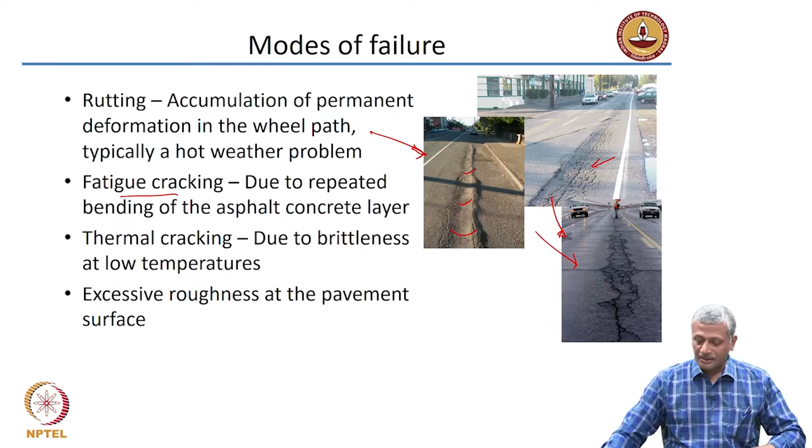Now, again, like polymers, asphalt also loses its flexibility with aging. Why is aging happening? Not just because of wear and tear caused by natural service conditions, but also because of the fact that you have ultraviolet radiation from the sun affecting the pavement surface. So, raveling is the term associated with the loss of flexibility of the asphalt layer or asphalt binder because of aging and oxidation.

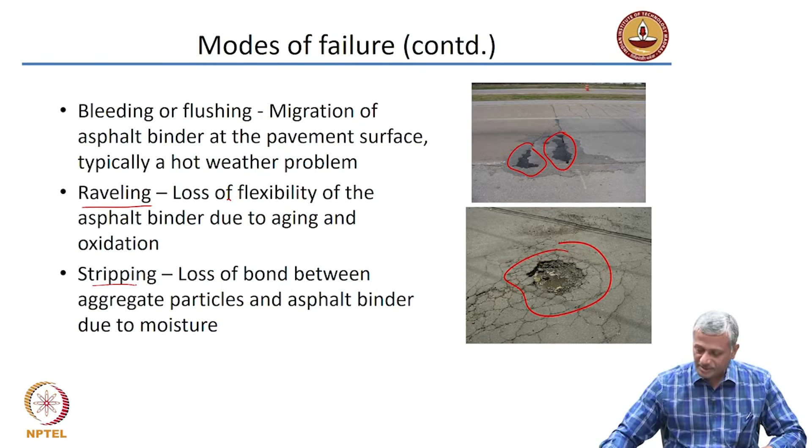Again, such potholes can also happen because of stripping, right. I showed you in the previous page also where aggregate gets completely stripped off from the asphalt. And sometimes of course you can take cores right through the highway pavement and then examine more closely what could have been the cause of the damage.

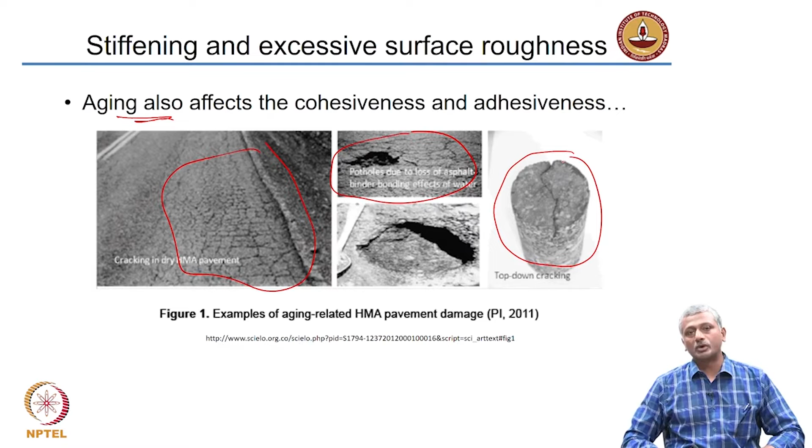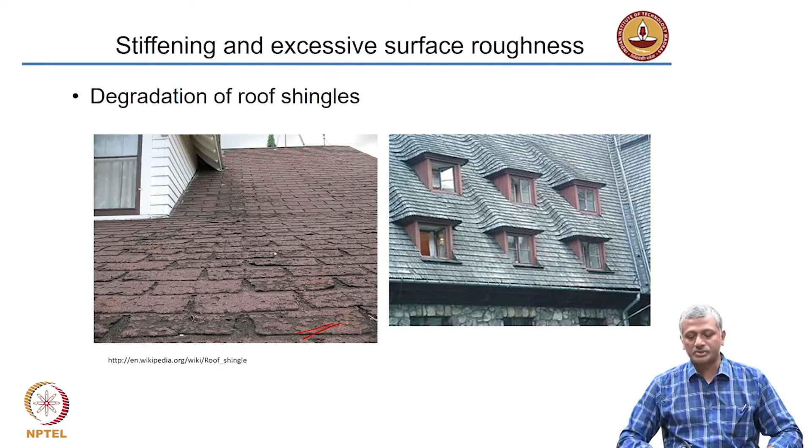Thermal cracking can happen at very low temperatures when asphalt becomes highly brittle. So, when it becomes brittle, in response to the loading the layer of asphalt concrete will bend and that will lead to tensile cracking in the system. So, you need to ensure that it does not happen by selecting the right asphalt which can function over a range of temperatures that are well defined.

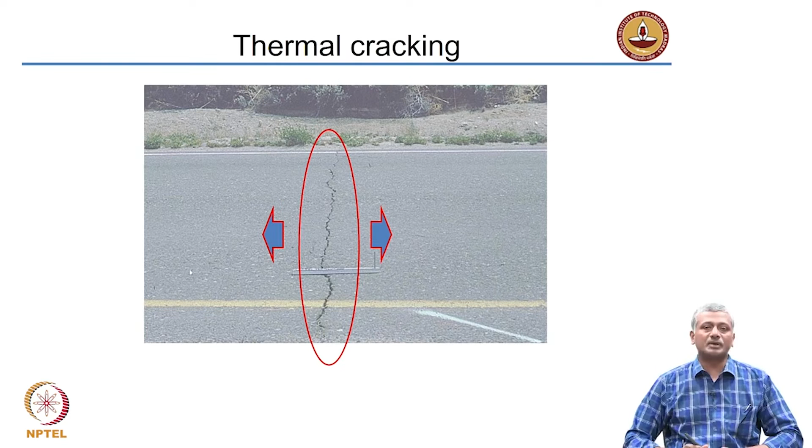So, you need to ensure that you are testing this aspect of the asphalt concrete before utilizing it in a specific pavement. Also, the needs of the asphalt concrete will depend on the type of pavement that you are making. Is that a national highway? Because there we expect all kinds of vehicles. The heaviest vehicles will be there, and you need to consider the tonnage brought in by the heaviest vehicles and convert that to the equivalent number of units of vehicles that will pass over that given cross section in a certain period of time. Based on that, you need to select your material properties to match the requirements of that particular road.

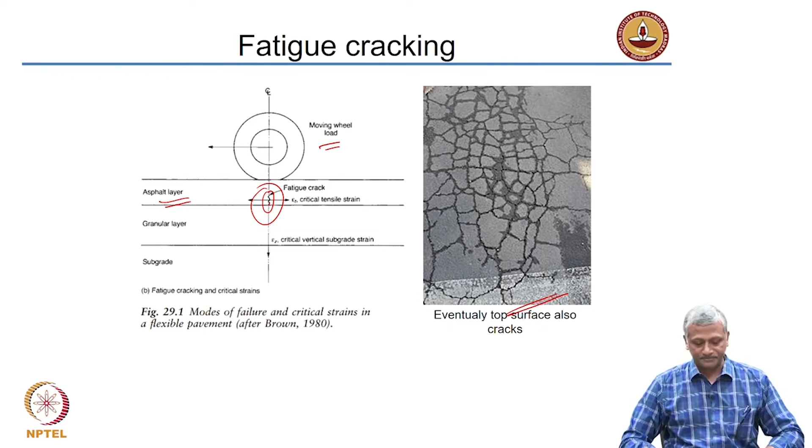Rutting, very easy to understand. You have the top layer of the asphalt concrete which is becoming soft as a result of high temperature, and when the wheel passes right on top of that, there is deformation. Deformation in the bituminous material is transferred to some extent to the granular material also, because the granular material is packed, but not packed in such a way that it does not move at all. There can be some depression forming in the granular material also. As more and more repetitive cycles of loading happen, this permanent deformation will keep on increasing.

Okay. So, you need to ensure that you design the highway pavements with asphalt which is able to sustain the temperatures. Now, one thing you need to understand, asphalt pavements are black. So, in the daytime they are going to absorb more and more heat radiation. As they absorb more heat, the temperature on the road surface will be certainly much higher than the ambient conditions.

Sometimes when the ambient conditions are 40 degrees Celsius, the temperature of the asphalt pavement can be as high as 60, right. So, because of this aspect, you need to ensure that you consider not just the ambient conditions, but what could be the temperatures which may happen in the asphalt pavement beyond the ambient conditions and design adequately for that.

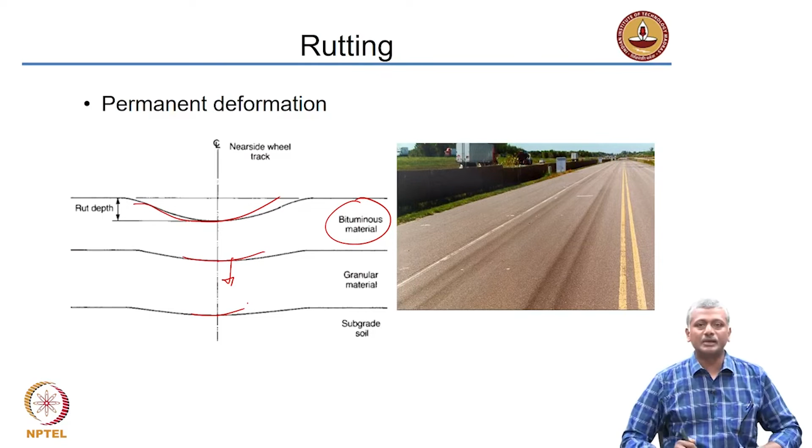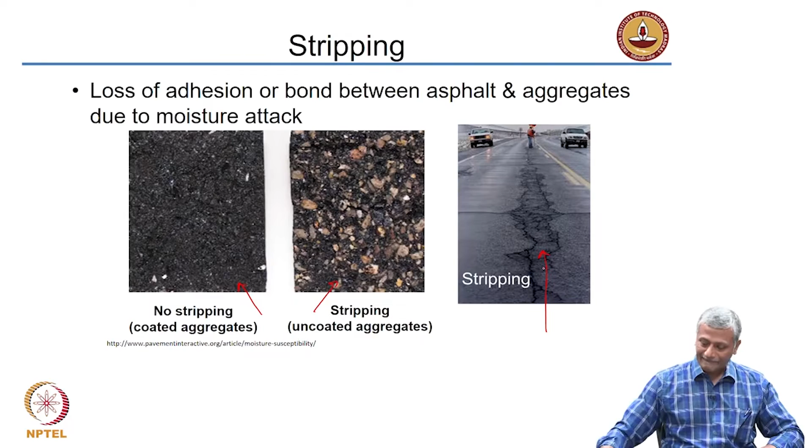Okay, so now we talked about asphalt as a polymer. The fact that asphalt needs to be mixed with the aggregate causes the asphalt to be either heated up to a temperature where it's almost like water, or it's very low viscosity, so it can mix with the aggregate, or we make cutback or emulsion and then use that for the production of asphalt concrete.

Now, once the pavement surface becomes degraded to a large extent, we have to replace the pavement surface. But one of the advantages that asphalt presents is that all you need to do is take this surface asphalt concrete layer, heat it up so that the asphalt again loses its viscosity and starts becoming fluid like, and then you have the chance to actually reuse this material, right, in a new pavement. So, that is the idea of recycling of the asphalt pavement.

You cannot do this with concrete, of course, because once the cement is reacted with water and hardens, you can't retrieve the cement back from it. Asphalt, on the other hand, as I said, does not undergo a chemical reaction with the aggregate. All it does is increase its stiffness or increase its viscosity to have a very solid like structure. Okay. So, in this case, all you need to do is just heat it up to cause it to start flowing again.

Okay. So, you can have different types of asphalt recycling. One is called surface recycling. So, here we just take the top 25 millimeters of the pavement surface and rework it using a heating system as well as a scarifying system. You can also take the material to a central plant and then grind the old asphalt pavement to a smaller size and then remix it to make the new asphalt pavement.

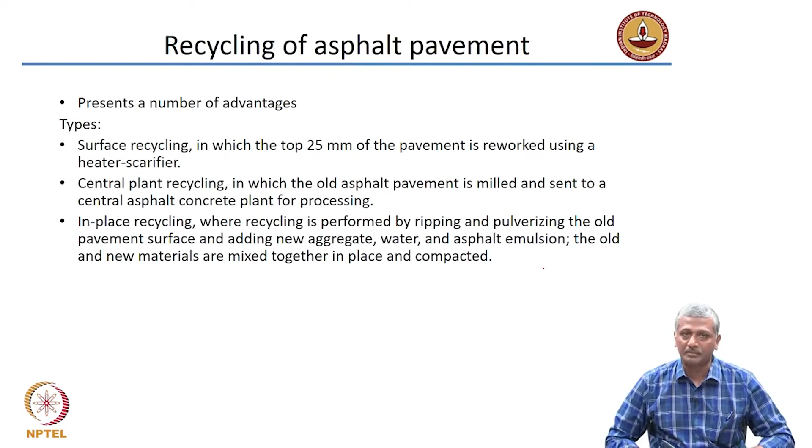But please remember, the asphalt has already undergone aging because of exposure to ultraviolet radiation and other environmental factors, moisture and so on and so forth. Now, this same asphalt is now getting removed from the existing pavement and recycled into a new pavement. So, you have to imagine that whatever asphalt you are getting in the new pavement from the old broken up pavement is going to be already an aged material.

So, you may have to add additional hot asphalt to ensure that you are satisfying the needs of the pavement material. Okay. So, you have to ensure that you are causing the formation of a new pavement surface where the functionality or the performance can be guaranteed for a required period of time.

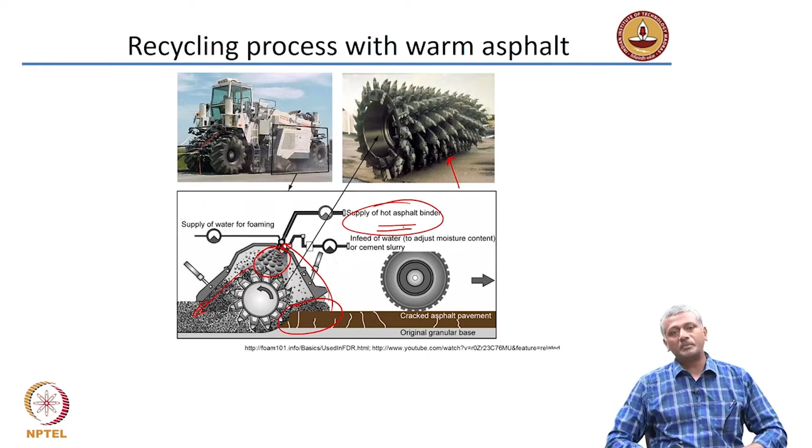Now, we talked extensively about asphalt and asphalt pavements. Now, let us come back to the discussion on concrete. We looked at how concrete is applied in buildings. Now, let us look at what we do with concrete pavements. So, in the beginning of this chapter, we discussed how a concrete pavement is different from an asphalt pavement.

An asphalt pavement is a layered system where the top layer is the most high quality layer and it distributes the stress in such a way that the subsequent layers below it feel lesser and lesser of the stress. But then the entire pavement accommodates the deformation because of the loading and is able to function satisfactorily because of that kind of an approach. That is why we call it a flexible pavement.

On the other hand, the cement concrete layer is rather rigid and it has to take up the loading by its slab-like behavior. So that's why cement concrete pavements are called rigid pavements. So rigid pavements are basically described as slabs on grade. That means you take a concrete slab, put it on soil, that's basically like a rigid pavement. Most of your sidewalks and pavement slabs like that are also slabs on grade.

Now, of course, you don't place it directly on the soil, you need to prepare the surface first, you also need to have the granular material as a base course, just like what you did with the asphalt pavement, and then you have the concrete slab coming on top. Now, what are the different categories of concrete pavements? As I said earlier, asphalt pavements do not have any joints. But if you want to make a concrete pavement, you will need to introduce joints if it's plain concrete. That means if it's not reinforced.

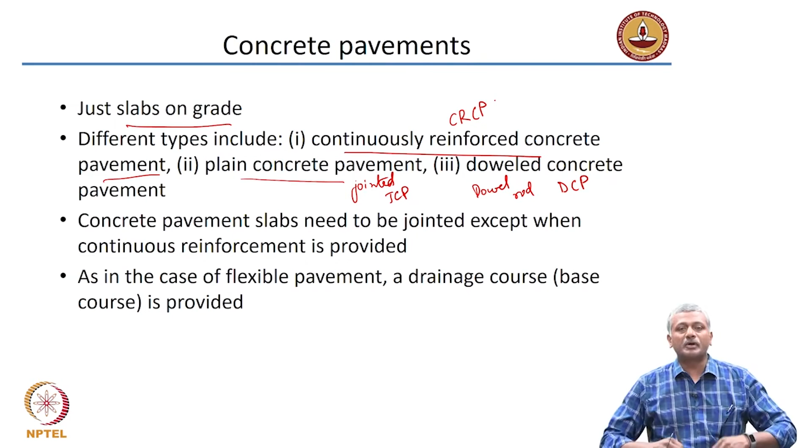Now, just similar to the case of the flexible pavement, you need to provide a base course which is meant not just for stability of the pavement but also for drainage. You need to provide that drainage course.

Now, of course, we talked briefly about why joints are necessary, but there can be other aspects also which may necessitate the use of joints. So, let me draw a pavement with concrete. Let us say this is a continuous strip of concrete and your vehicles are moving in that direction. If I draw the front view of the pavement, it will be basically a concrete slab like this.

So, what will happen if you consider any small section of this concrete slab: because of temperature and shrinkage effects, concrete shrinks. Please remember, we had this discussion previously. There is excess water in the concrete which starts drying out. So, there will be a volumetric contraction in the concrete. Whenever that contraction is met with a restraint, if that contraction does not get permitted to happen, you will start getting cracking in the concrete.

So, this slab is resting on the ground, right? It is not hanging freely in air. So, if the slab wants to contract because of shrinkage effects, what is the ground going to do? It is going to provide a restraint and prevent it from contracting. So, because of this restraint, there will be a tensile stress generated in the pavement slab.

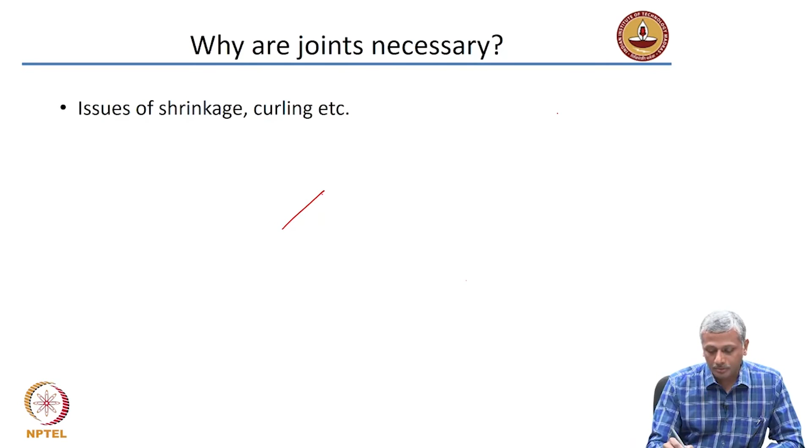Now what do you mean by curling? Let us take a look again at a typical cross section. Let us say we have a jointed slab resting on the ground like this. I am just drawing one particular slab. Let us say that is the direction of traffic. So in the daytime, you get a lot of solar radiation.

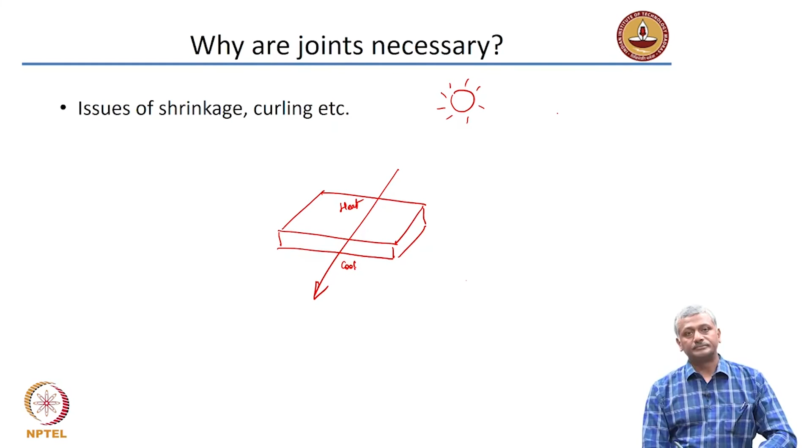What is that going to do? It is going to heat up the top surface while the bottom surface will be cooler. Top surface will be hotter because of solar radiation and bottom surface will be cooler. So what's that going to do? It's going to start bending the slab. If I draw the slab like this and solar radiation causes the top to get heated up, the top is having a higher temperature as compared to the bottom.

So because of that, what's going to happen? There may be some expansion of the top, whereas there will be some contraction of the bottom. Bottom wants to contract, top wants to expand.

So in other words, your entire pavement slab now has started curling. That is why we call this phenomenon curling. Now what will this do? If the temperature differential is too high, it will start resulting in cracking wherever you have expansion, because expansion means tension, concrete is in tension, then you start cracking.

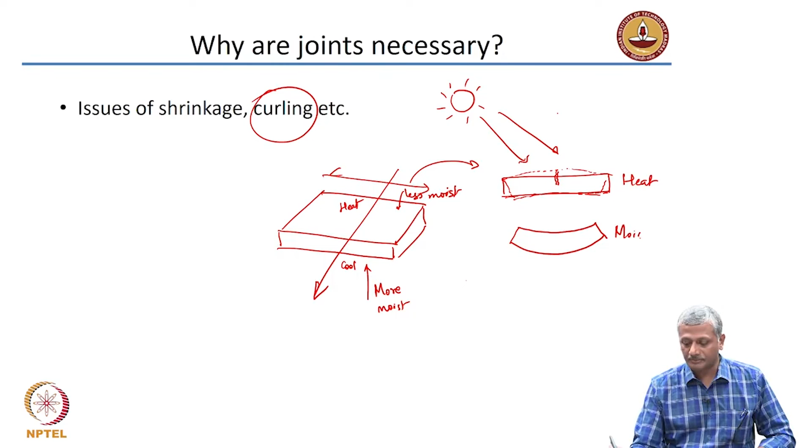Now this can happen because of heat caused by solar radiation, or it could also happen because of moisture. So take the case of moisture. Obviously there will be more moisture at the bottom and less moisture on the top. So in that case you may get an opposite effect. You may get the bottom that wants to bend or expand and the top that is contracting. So this is heat and this is moisture effect. Note that these are opposite to each other because of the availability of the moisture.

Okay? So these are aspects that you need to design your concrete against, and that is why when we talk about cement concrete pavements, it is no longer the compressive strength that is the deciding factor. The tensile strength is very important. The tensile strength is the property that you will be using to decide upon the suitability of a particular concrete type for use as a pavement slab. It's no longer the compressive strength but the tensile strength.

Of course, we saw earlier in the concrete chapter that usually tensile strength is related to compressive strength. The higher the compressive strength, the higher the tensile strength. But tensile strength, or tensile load carrying capacity, can also be improved by using fibers. That's why today people are trying to work out strategies of using fiber reinforced concrete pavements.

And that reduces the requirement of the thickness. If I use fiber instead of plain concrete, I can reduce the thickness of the pavement significantly to take the same extent of loading. And also work against the cracking that happens because of curling and shrinkage related issues. Why? Because fibers will have the tendency to bridge the cracks.

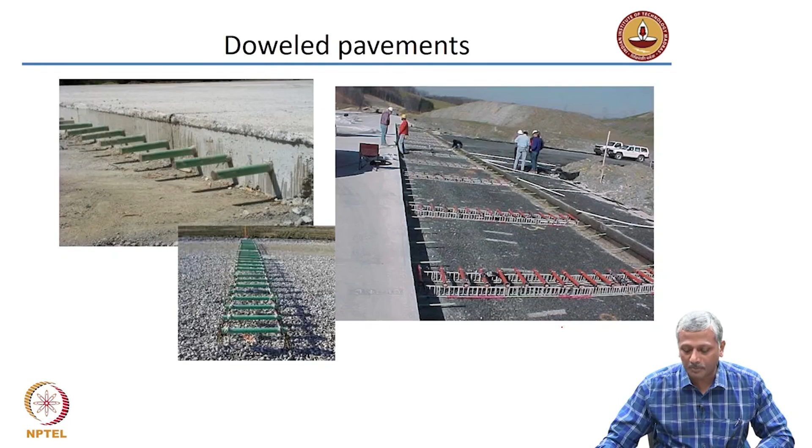So, instead of fibers, you can imagine that you are now using dowels across the joints. To explain dowels a little more, let me draw this again. Let us say I have this pavement here which has a joint in between. Now, as the wheel is passing on top of the pavement, this slab will tend to deflect down. I am exaggerating, obviously; this level of deflection will not be seen, but there will be a deflection of the slab down, and as it passes on to this side, this slab also will start deflecting down.

At the joint, there will be a major deflection of this slab and the next slab. So every time your wheel passes over the joint in the pavement, there will be a big depression in the pavement. That means the wheel will bump there, and that is not very good for rideability. That means your stress transfer is not happening effectively from one slab to another. So, how do we ensure that the stress transfer happens properly? We put in dowels.

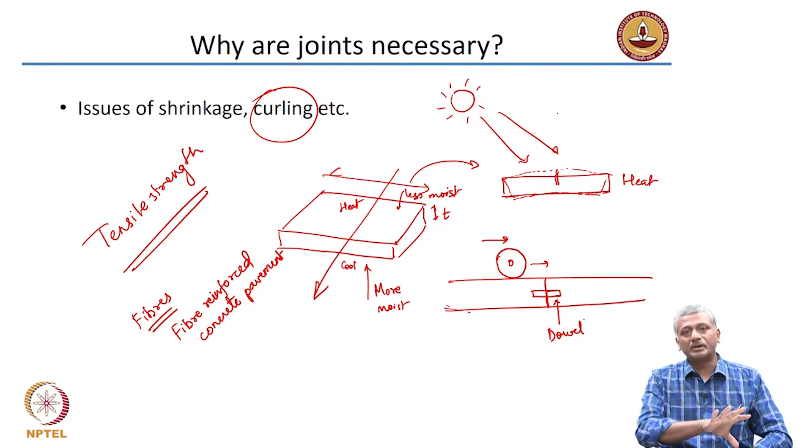What are dowels? So, this is a joint here, and I just put a steel rod like that; that is my dowel. The dowel ensures that when the wheel moves from one slab to the next, there is effective load transfer. Okay, dowel is provided at the joint to ensure that there is proper load and stress transfer from one slab to the next.